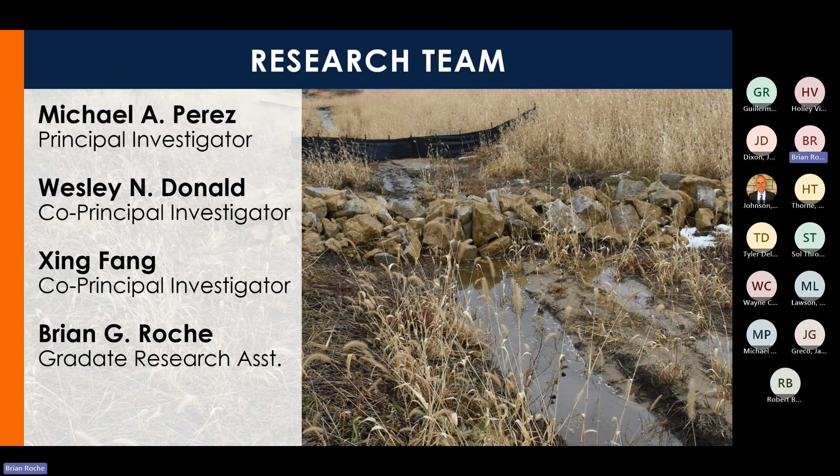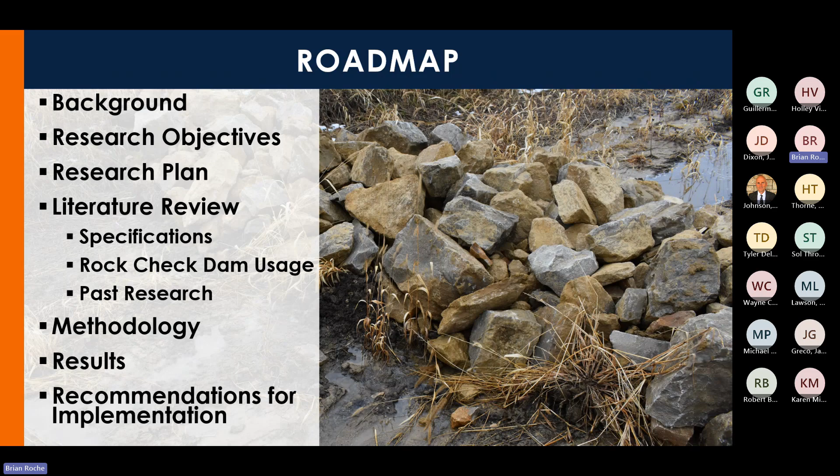Quickly, just wanted to touch base on the plan for the presentation. We'll start with some background, then go through some research objectives, our research plan, our literature review, and then our testing methodology, results, and recommendations from all this.

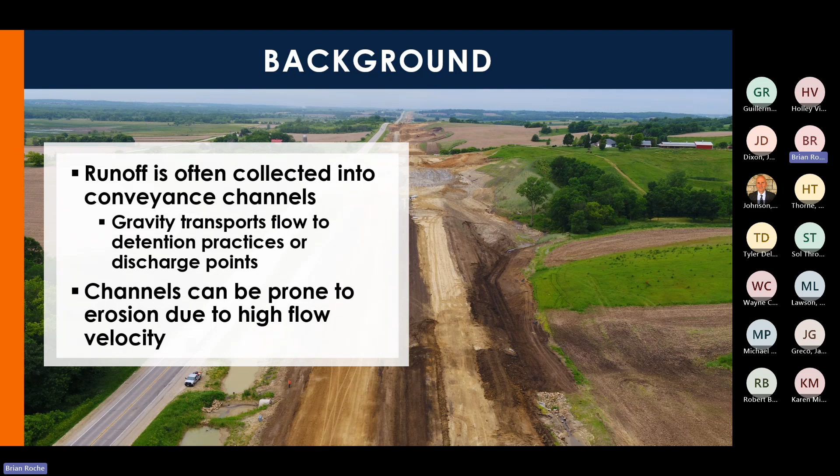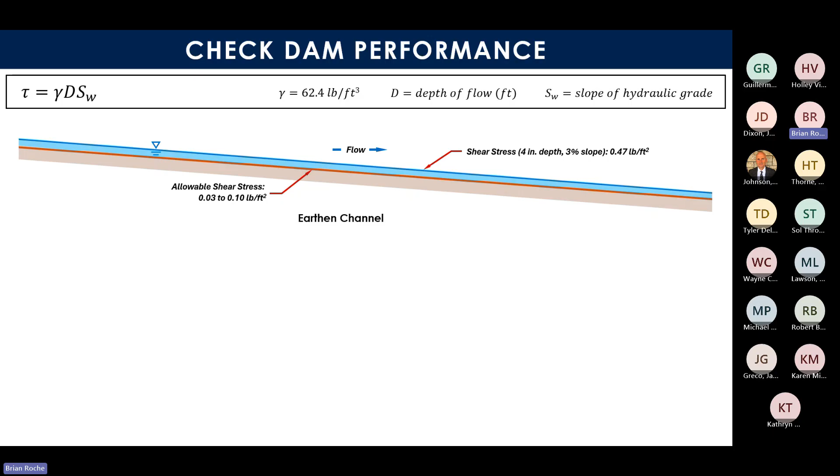Runoff on construction projects, especially highway construction, is often directed into conveyance channels. These channels can be at risk of erosion, especially before stabilization, due to high flow velocities, which can also prevent that stabilization from occurring. Shear stress is the leading driver of erosion in channels and is based on the flow depth, the unit weight of the fluid, and the slope of the hydraulic grade line. Earthen channels don't have much allowable shear stress before erosion occurs if they're not stabilized. Even this 4-inch depth flow would be erosive for this earthen channel.

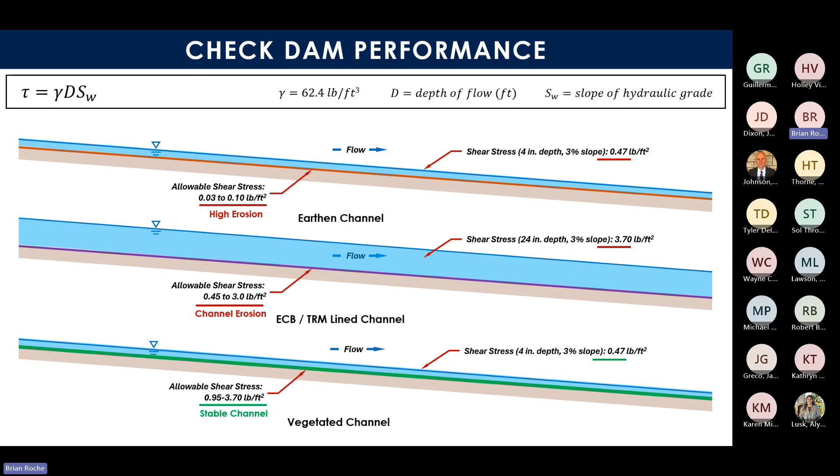Vegetation being established in channels can increase the shear stress capacity of a channel and prevent erosion from occurring. However, a lot of times on construction projects, vegetation has not yet been established. Other erosion control practices, such as erosion control blankets and turf reinforcement mats, may be used to increase the shear stress capacity of channels and prevent erosion. However, channels with more flow can increase the shear stress to erosive levels for both vegetated or lined channels.

So to improve the protection of these channels, ditch checks, such as the rock check dams we're going to talk about today, are installed to reduce the slope of the hydraulic grade line to effectively zero, therefore reducing the shear stress to zero and protecting the channel from erosion. However, as you can see here, these are only effective if they impound the full height of the installation and are able to form that pool of slow-moving water that reaches the previous installation.

Improperly installed, designed, or maintained ditch checks or check dams that do not impound flow to the top of the installation are going to have areas of channel that are still subject to those steeper hydraulic grade lines and erosive conditions. So you'll have some areas protected from flow. However, upstream of that hydraulic jump, or the location where flow transforms from high energy erosive conditions to slower moving non-erosive flow, the channel will have highly erosive conditions upstream that still have that high slope of the hydraulic grade line.

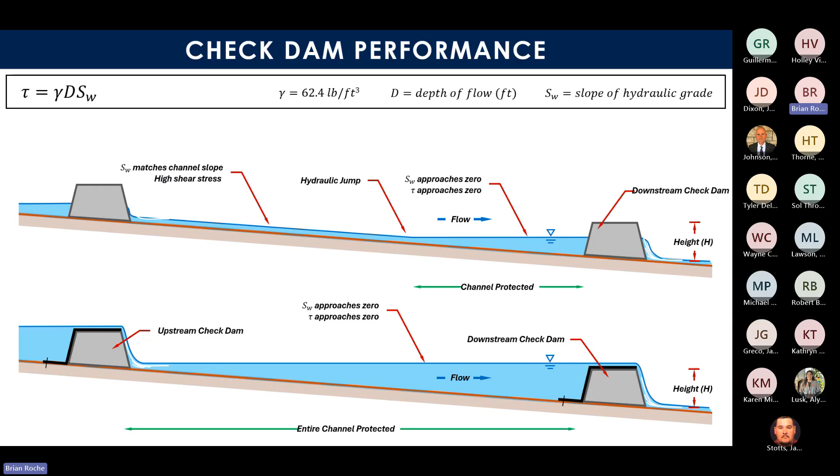Ditch checks are used to prevent erosive flows by forming a pool of water upstream, slowing velocity. These primarily function as an erosion control practice, but they do have some secondary benefits in sediment capture through deposition in that impoundment formed upstream.

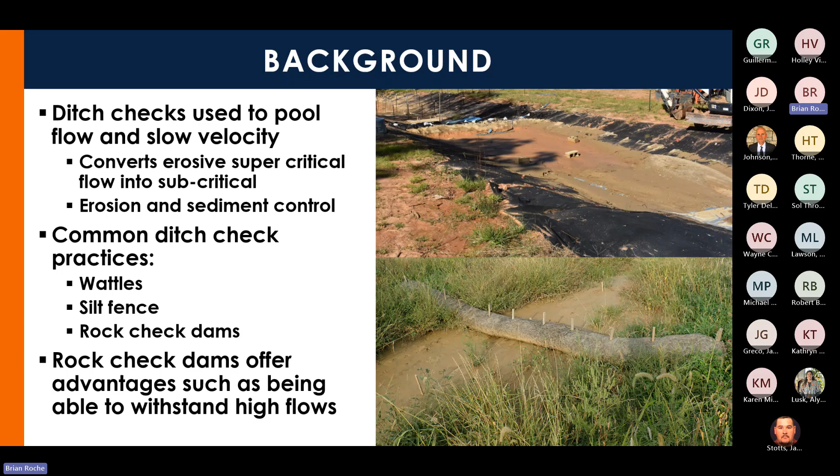Common ditch check practices are wattles, silt fence, and rock check dams, with rock check dams offering advantages over the others. They're commonly recommended or used in channels where high flows are expected, or where other installations have failed due to higher flow rates, because rock check dams, being formed of rock, are less likely to wash out due to high flows.

These ditch checks are typically installed in series in a channel, with multiple going down the channel, spaced apart based on the theoretical ponding length. The top of the downstream practice is at the same elevation as the bottom of the practice immediately upstream, so that if it impounds all the way to the top and overtops, you'll have that pool of water stretching from one installation to another, ensuring the entire channel is protected.

However, in practice, a lot of times this doesn't happen. With a high flow-through rate for a ditch check, you're going to have portions of the channel that'll be unprotected from those erosive flows.

This leads us into the objectives for this research, which is to evaluate the existing Iowa DOT rock check dam standard through large-scale testing, and then use the testing results to develop and evaluate efficient, cost-effective rock check dam installation enhancements.

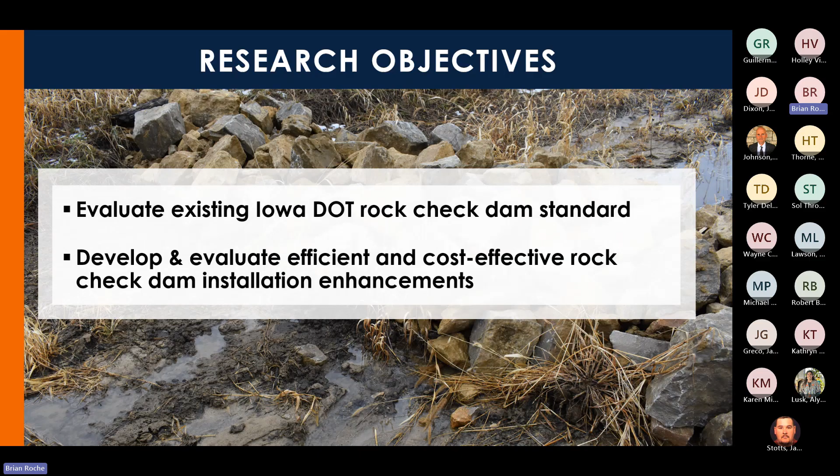To complete these objectives, we developed a 5-stage research plan, starting with a literature review with the goal of aiding in identifying modifications and developing testing methodology, leading into development of our testing methodology, and then conducting our full-scale experiments and analyzing data.

Tasks 3 and 4 were an iterative process where we analyzed the data from some tests and used that data to develop modifications to then evaluate further. Our final task was taking all of this data and recommendations and developing a final report that outlines the literature review, the methodology, the results, and the recommendations.

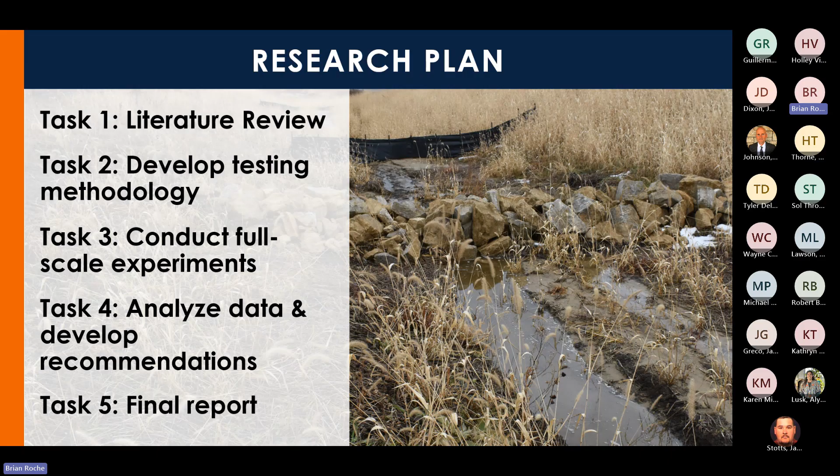Our first completed task was the literature review, which focused on investigating rock check dam standards for other states and jurisdictions, the Iowa DOT's usage of rock check dams, and past research on ditch checks as a whole and rock check dams.

First, we looked at rock check dam installations for DOTs across the U.S., as well as some international standards. We saw a good bit of variation in components, such as the size of rock, the height of the check dam, the use of overlays, underlays, the depth of the weir to allow for controlled overflow, and whether they're trenched in. We did see, however, that most are similar to the Iowa DOT standard.

About 2.5 feet tall, with a 6-inch weir, composed of large rock only, with a geotextile underlay and excavation beneath the installation. We did, however, see that some jurisdictions used components to increase impoundment, such as 2 using geotextile overlays and 11 using a small choker stone on the upstream face.

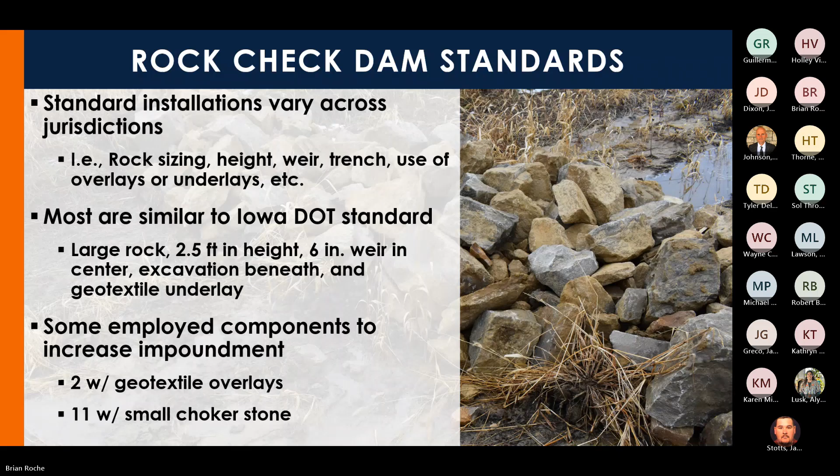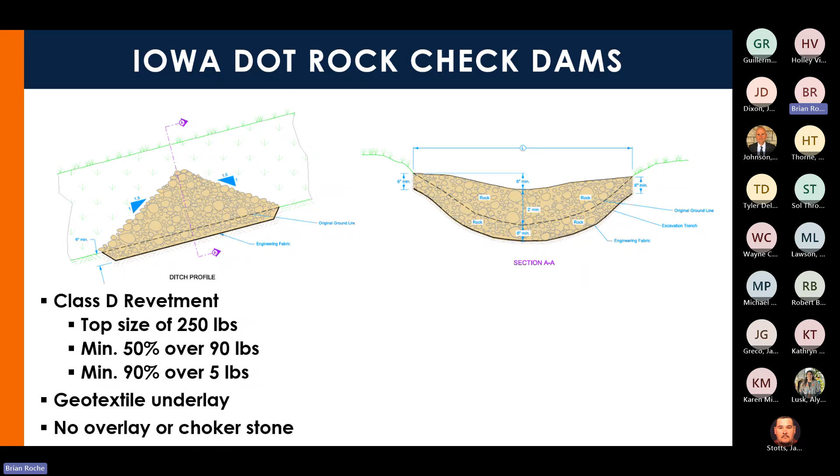The Iowa DOT standard used large rock alone with a top size of 250 pounds, at least 50% of that rock being over 90 pounds, and at least 90% being over 5 pounds. They had no overlay or choker stone, so no additional components aid in the formation of impoundment besides the rock. There's also a geotextile underlay going under the entire installation to prevent undermining, as well as a 6-inch excavation in the channel that the check dam was installed in.

We also wanted to look at how much Iowa actually used these practices, so we looked at 5 years of bid tabs on Iowa DOT highway construction. We found that in total they spent over $4 million on these rock check dam installations, in both installing, maintaining, and removing these practices, with an average cost of over $500 per check dam. This really indicated there's a research need to make sure these funds are being used effectively.

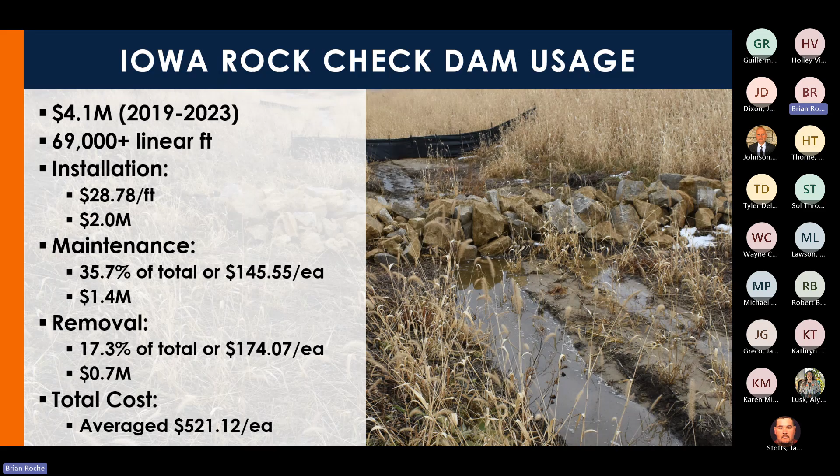So diving into some past performance testing. Most have been completed on other practices, typically wattles. This research is divided into 3 main categories: field monitoring, small scale testing, and large scale testing. We didn't really see much testing on rock check dams, but we did find some large scale research that we'll get into.

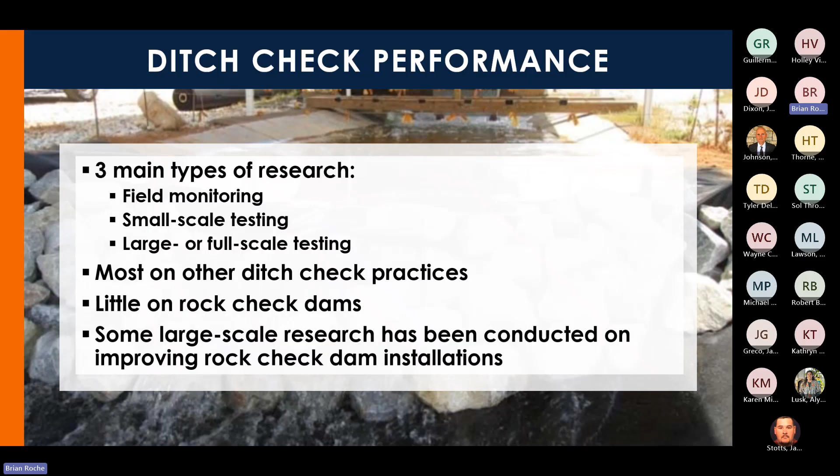So small scale testing is primarily in flumes, and this has really been focused on wattles. A big takeaway from these flume evaluations is that most practices do not impound to that theoretical level, as you can see in this graphic here that spacing guidance is based on, even if they're able to impound to the top of the practice.

Additionally, a performance measure called impoundment length and depth efficiency was developed that indicates the percent of the channel that's protected from erosive flows. The actual impoundment length in these tests was determined based on the length of that subcritical flow, from the upstream face of the practice to the hydraulic jump, compared to that theoretical standing pool to develop an efficiency.

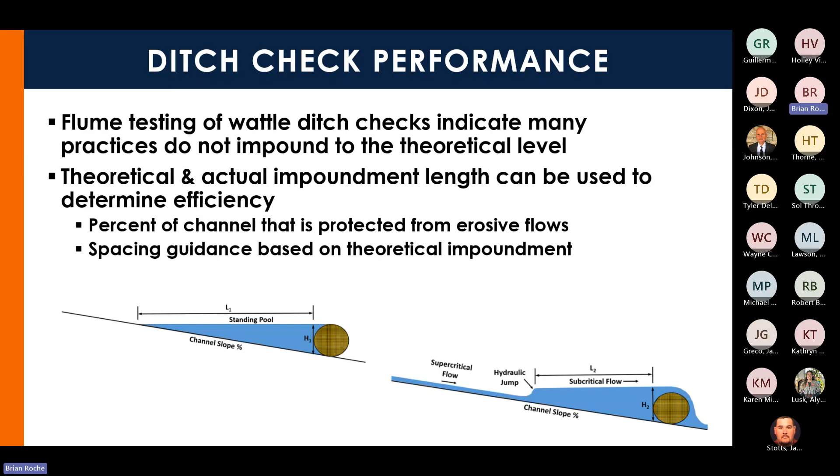One field study we focused on was completed in Iowa a few years ago. It evaluated standard and modified ditch check installations, including silt fence, wattles, and rock check dams. Wattles and silt fence were able to be improved to prevent occurrences of failure.

The Iowa DOT standard rock check dam was found to be kind of ineffective at preventing erosion due to undermining and high flow through rates. But unfortunately, these installations were not able to be modified due to changing site conditions, which is a common limitation of field monitoring studies, along with different storm and site conditions that can make comparisons difficult between different sites.

So large-scale testing, such as those completed by Donald et al. at our research facility back in 2014, attempts to reduce the limitations of small-scale testing and field monitoring by evaluating full installations under controlled conditions.

This particular study found that the large rocks of the Alabama DOT rock check dam standard failed to protect more than half the channel, with an impoundment efficiency of only about 48%, and that this performance was increased using either a coarse aggregate choker on that upstream face or a geotextile overlay.

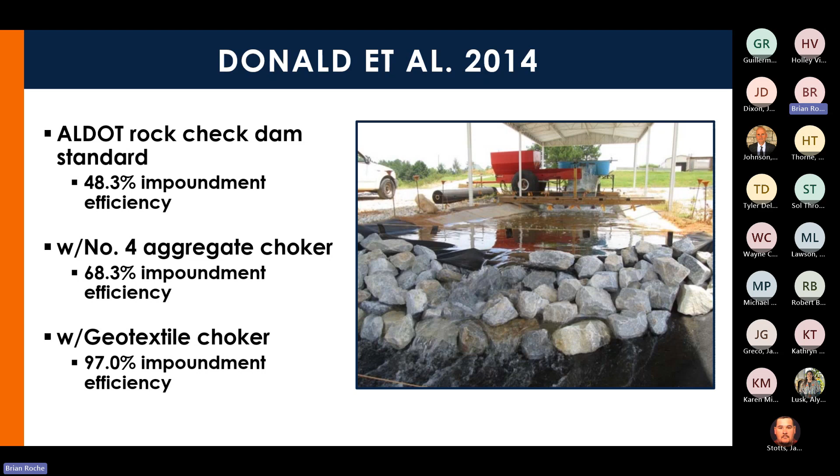So our literature review as a whole found that there was a clear disconnect between rock check dams commonly used and prior performance testing results. We're seeing that DOTs around the country are spending a lot of money on these installations that can definitely be improved.

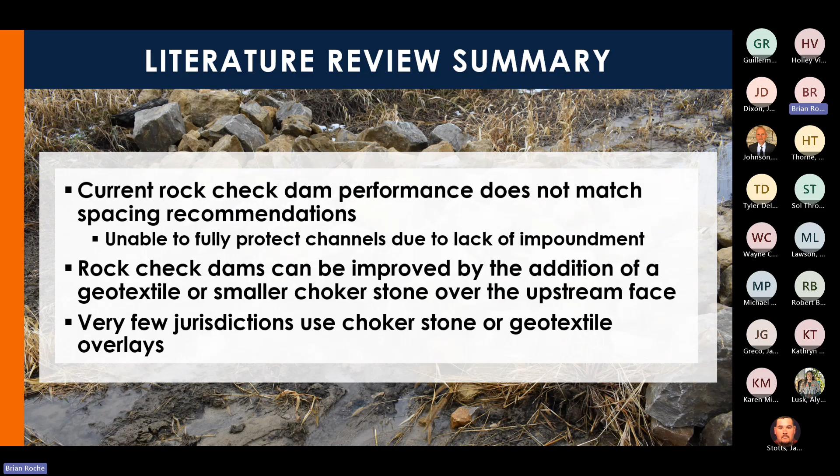So from there, it leads into our second task, which was the development of our testing methodology. All of our testing occurred at the Auburn University Stormwater Research Facility, a 10-acre outdoor lab space dedicated to producing innovative and practical solutions for stormwater management through interdisciplinary research, product evaluation, and hands-on training, with testing occurring in this channel right here.

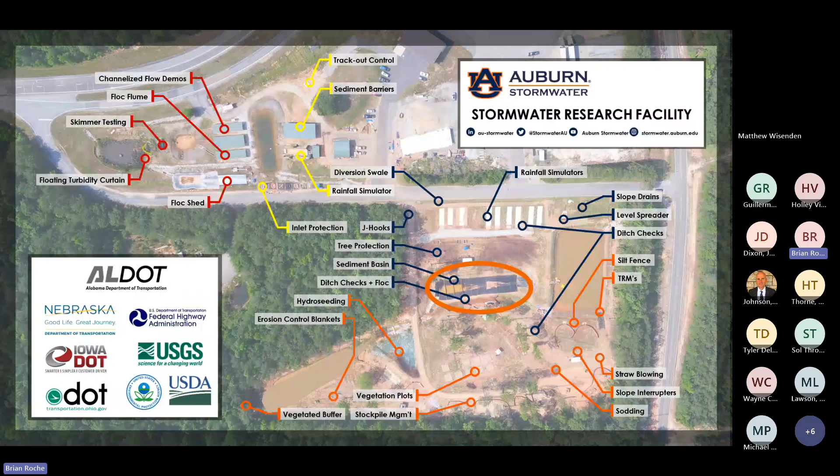This testing was completed in a channel with a downstream sediment basin representative of those found on Iowa highway construction projects. The entire channel was lined with geotextile to prevent extensive maintenance between tests and to allow for repeatable results, making sure there aren't variables affecting results. But in practice, these channels would likely be earthen and unlined.

So we introduced flow from a nearby supply pond into a weir tank with a series of valves that allow for the adjustment and monitoring of introduction flow rates. After the flow leaves that weir tank, it flows into a flow transition area that aims to reduce that initial energy to conditions representative of Iowa highway construction projects.

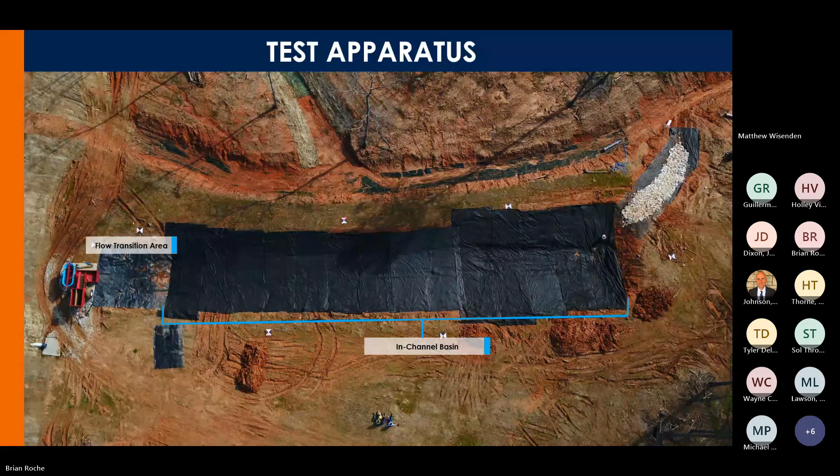So the geometry of the standard Iowa DOT roadside channel has a 10-foot bottom width, a 5-foot depth, 3-to-1 side slopes on one side, and 3.5-to-1 on the other.

So in our test channel, which you can see here, we installed string lines to serve as measurement cross sections, approximately 5 feet apart. We installed 16 upstream and 2 downstream. For the upstream, we wanted to make sure we're going past that maximum theoretical impoundment length, which we found to be 63 feet, so between cross section 3 and 4 here.

We found, based on a survey, the elevation of the channel that would be equal to the height of the check dam downstream. We also installed those 2 downstream cross sections to make sure we're evaluating conditions immediately after the installation.

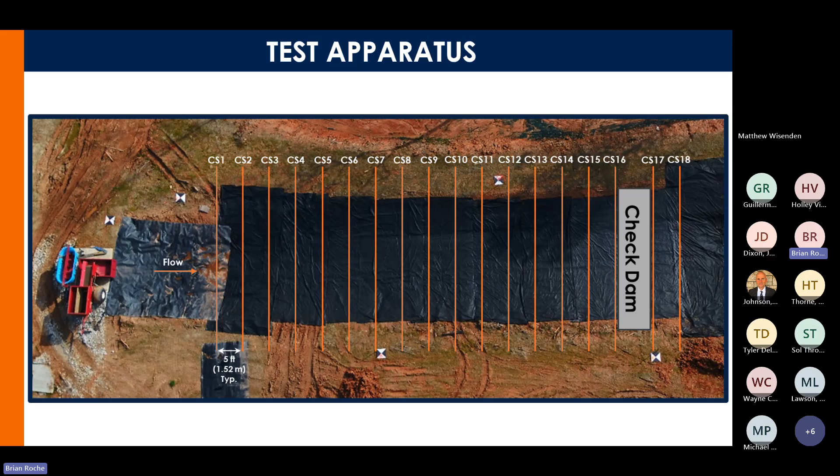At first, we're primarily looking at hydraulic performance of these installations due to their use as erosion control practices and slowing flow. So each cross section, we measured flow depth and velocity at 3 locations to generate a full flow profile. We also measured the distance from the front face of the installation to that hydraulic jump to compare to that theoretical impoundment length of 63 feet to develop an impoundment efficiency.

We also wanted to evaluate dewatering time to make sure that practices can recover from storm events and be able to withstand another one coming in after, as well as, if there's extended dewatering times, you'll have difficulty establishing vegetation.

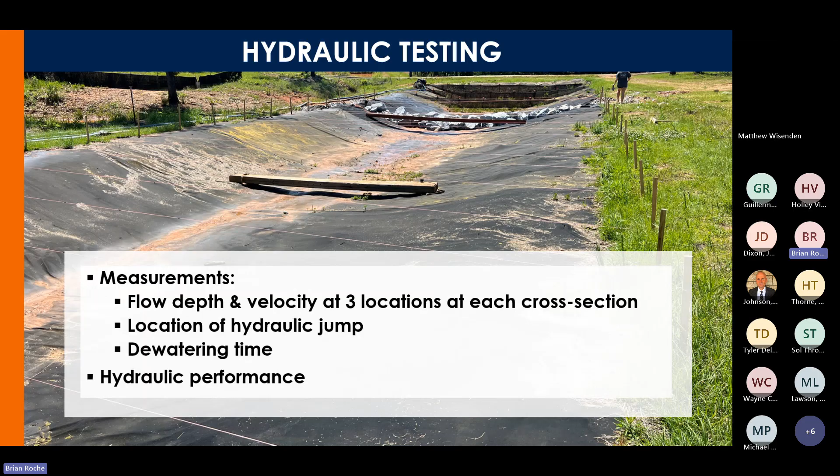So first, we evaluate our standard installation, followed by 4 modifications. Each installation was evaluated 3 times for hydraulic performance under both a low and high flow rate. That low flow rate is representative of the peak flow of 1/2 acre in Iowa, and that high flow rate is 1 acre, to indicate performance under various conditions.

Developing these modifications was an iterative process with the overall goals of increasing performance and reducing costs. So after we evaluated the standard and 4 modifications for hydraulic performance, we selected the highest performing one, with also consideration for cost and installation efforts, to be our most feasible and effective installation, or our MFEI.

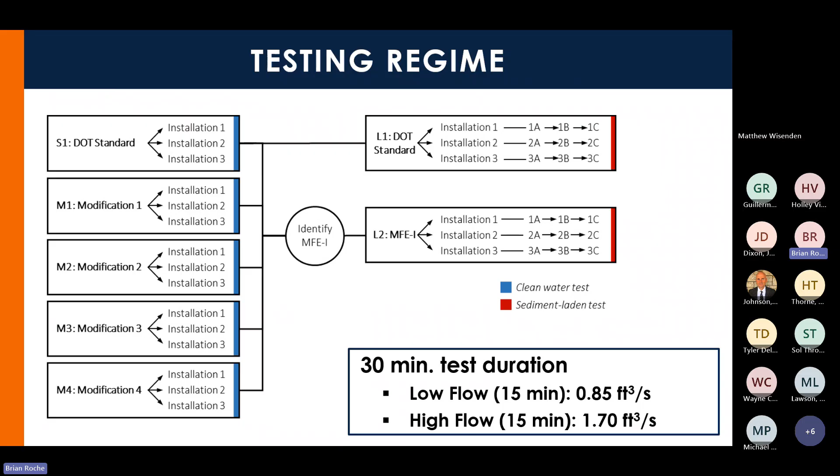After completing the hydraulic testing, we evaluated both the standard and the MFEI under sediment-laden conditions to determine improvements in secondary sediment control benefits.

The sediment-laden testing used a sediment introduction rate of about 65.4 pounds per minute, seeded by hand, and a flow rate of 1.7 cubic feet per second. This rate's identical to testing of past Iowa DOT sediment basin practices using that same testing apparatus that we're using, to allow for comparisons. Additionally, during testing, we took water quality samples every 3 minutes during the flow introduction period.

And also regularly through that dewatering period afterwards. We took these samples at 3 locations: one upstream of the theoretical impoundment length to serve as a kind of introduction of turbidity and total suspended solids, as well as immediately upstream of the check dam and downstream, to determine overall treatment.

So our third test is actually getting into the completion of our large-scale testing. First, we're going to start with the hydraulic testing results, and this was just flow straight from the supply pond with no additional sediment added.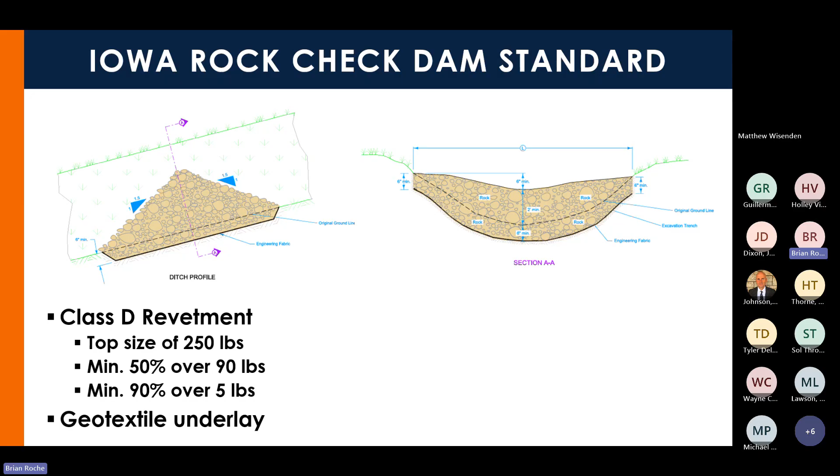So our first test was on the Iowa DOT rock check dam standard, which you can see here. We had large rock, a geotextile underlay, and an excavation beneath. And here's what it looks like in action. You can kind of see very little impoundment formed upstream.

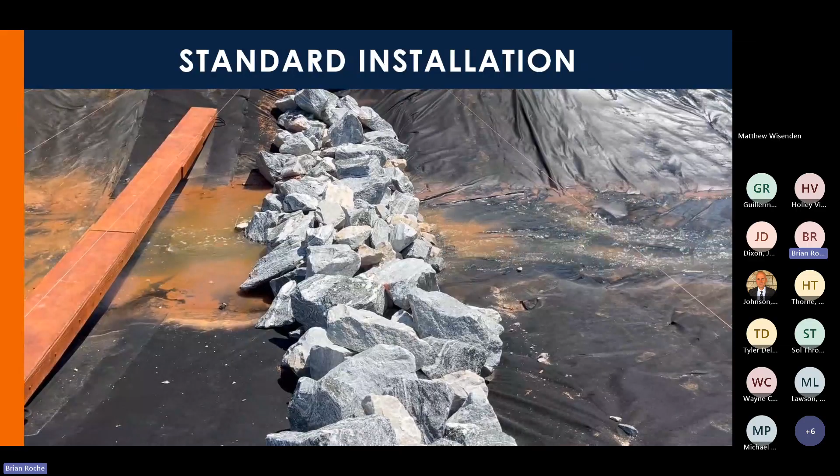One thing we also wanted to consider through all this was keeping cost in consideration, to make sure our results are practical and implementable. So for each installation, we did an approximate material cost estimate, with the standard being about $673 of material.

So the standard installation only impounded an average of 6 feet upstream under those high flow conditions, which really indicates that over 90% of the channel was still subject to those highly erosive flows. And we really saw, looking at flow velocity, it only reduced flow velocity at that first cross section immediately upstream, and also immediately jumped back to highly erosive flows downstream.

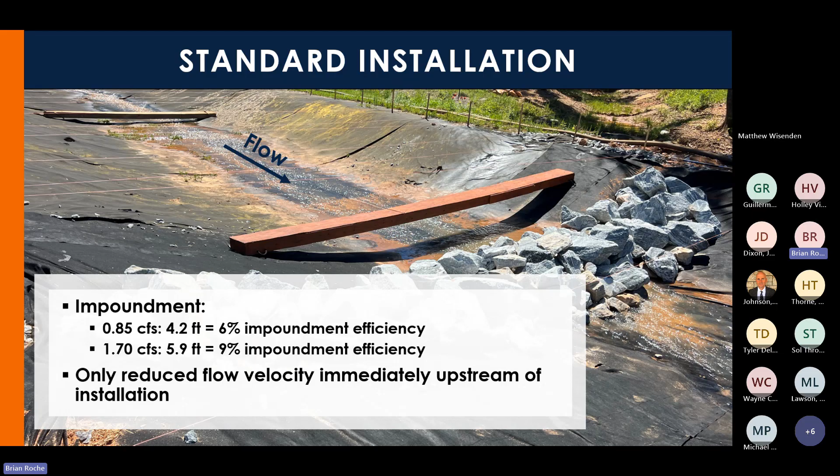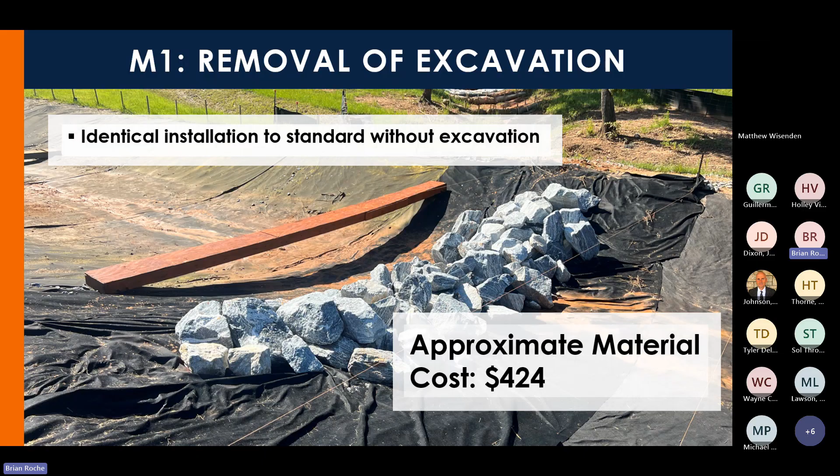So our first modification intended to see if the excavation beneath the installation actually aided in the formation of impoundment. The removal of this excavation would save both material costs, with a reduction of approximately $250 of material, while also reducing installation efforts and costs.

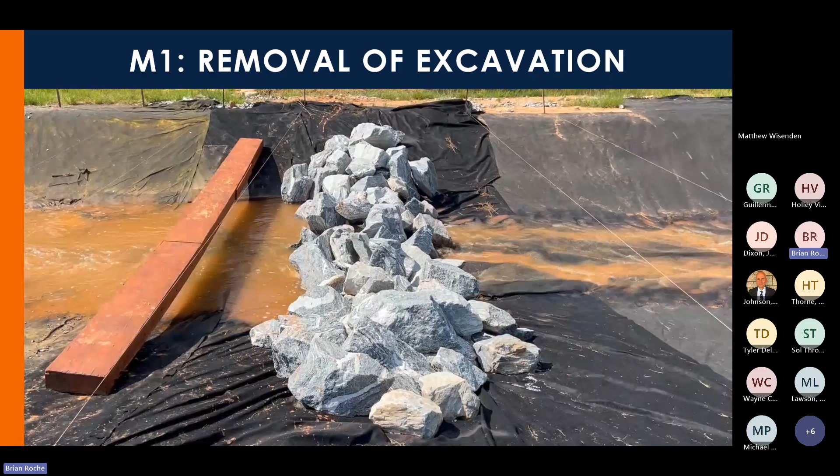So as you can see here, it performed very similar to the standard installation, with very little impoundment formed upstream. And you can actually see that hydraulic jump on the left of the screen is only a few feet from that front face of the check dam.

So we ran some statistics. We found that there was not a statistically significant difference in impoundment formed compared to the standard, kind of indicating that cost can be reduced by just installing that installation on grade. Due to this conclusion, most of our other modifications were installed on grade, due to us not seeing any degradation of performance with the removal of that excavation.

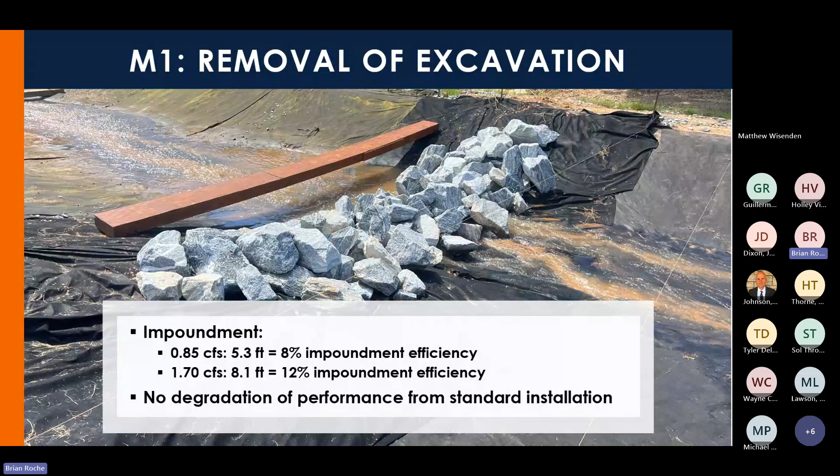So through these two installations that used the larger rock, we really saw that flow was able to pass through large pores between these rocks, leading to a lack of impoundment formed. That led us to our second modification, where we're trying to improve performance using a smaller rock gradation that results in smaller pore openings.

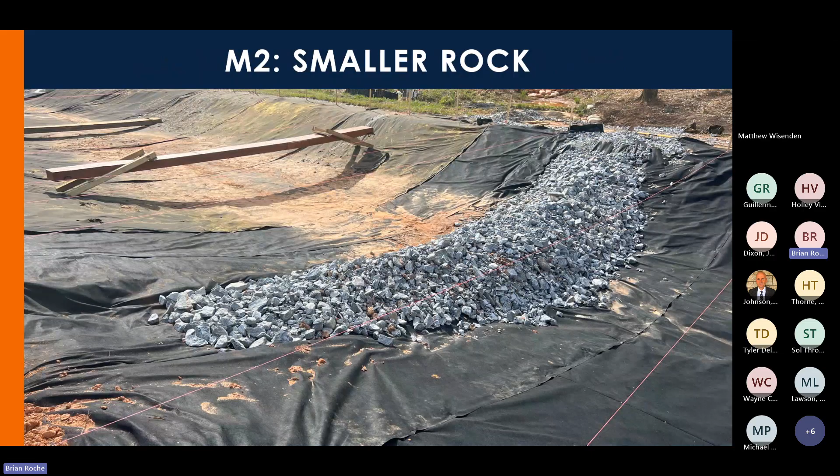For this, we used a gradation of rock that's often used on Iowa DOT construction projects, which they call their erosion stone. It's a nominal 6-inch diameter, between 3 and 9 inches. We wanted to make sure to use a gradation of rock that's actually available in Iowa to make sure it's implementable. This installation did use that excavation from the standard, as we were only trying to determine if that rock gradation improved performance. Additionally, this reduced approximate material cost due to this material being less expensive than the larger rock.

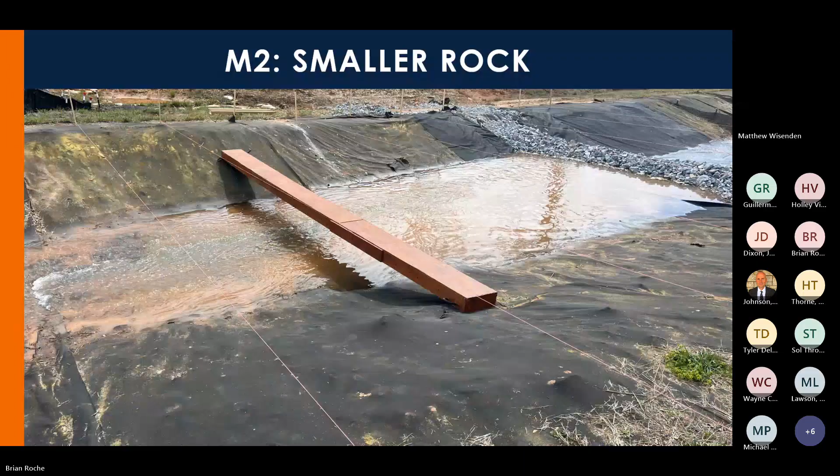Here's a better angle if you can see that length of impoundment. We found that under that high flow rate, we're able to get to approximately half of the channel.

Additionally, one thing we were a little bit worried about switching to smaller rock was washout. We did not observe this even under higher flow conditions above 1.7 cubic feet per second.

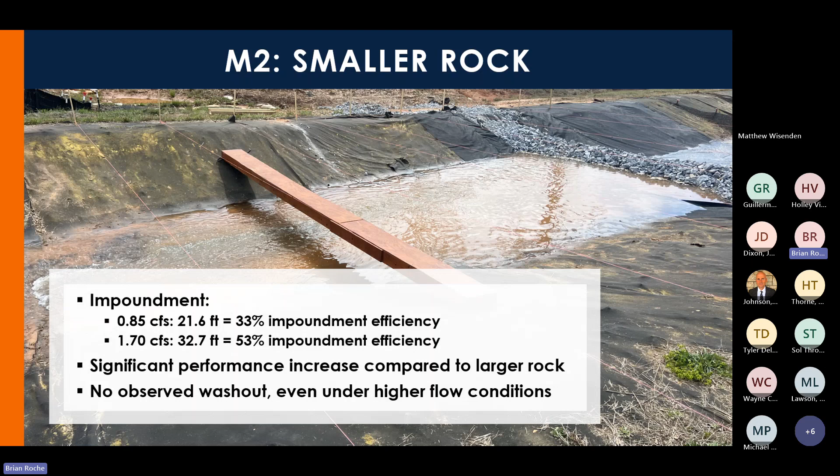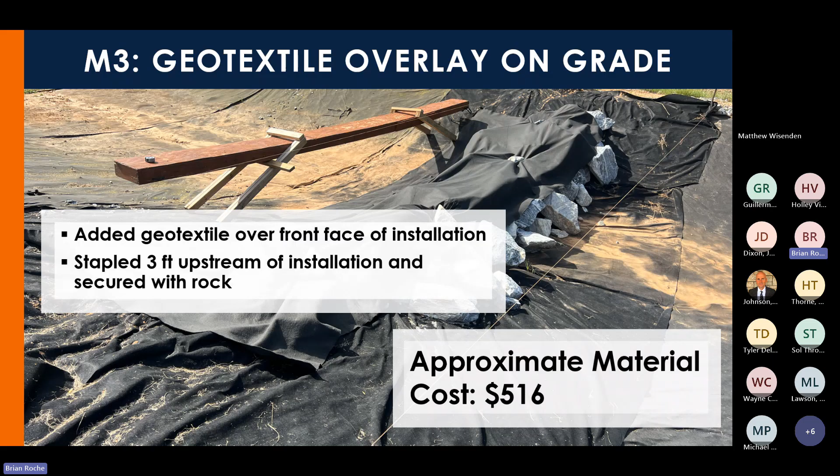So based on the previous research, we added a geotextile overlay to that standard rock gradation. This was secured 3 feet upstream with sod staples every 6 inches, and then on the downstream of the installation just with loose rock. We saw a slight increase in material cost compared to that large rock with no excavation, due to the cost of geotextile, but this was still beneath that standard cost due to not having the excavation that requires more material.

So this did considerably increase impoundment formation, to about 78 and 77% for those low and high flow rates.

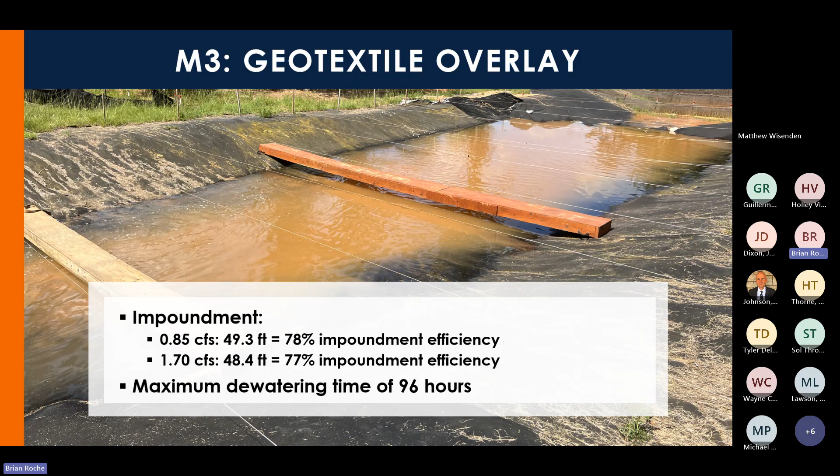However, we did see a couple of deficiencies. One of these being extensive dewatering time. Like I've mentioned before, if this pool of water is able to remain in the channel for extended periods of time, you're going to be less likely to have vegetation established in the channel, which is the final goal of these projects. Additionally, as you can see here, we saw flow was overtopping at the low points between these large rocks and not impounding at full design height of the installation, leading to less impoundment formed, with only 78% of the channel being protected.

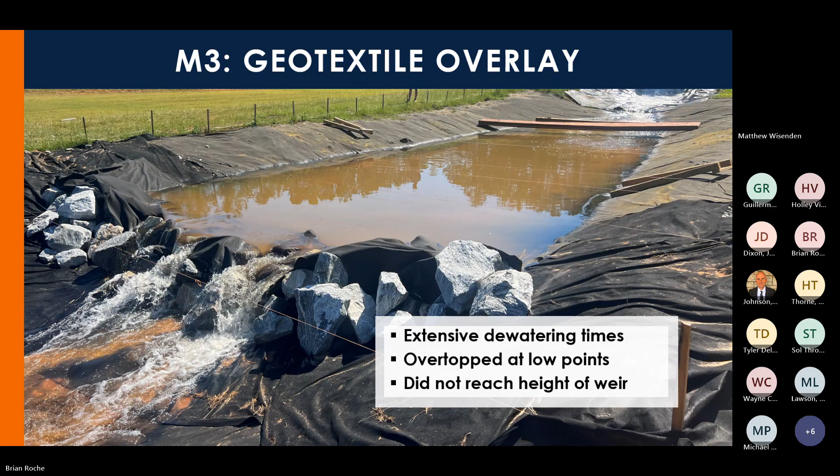So the first of these deficiencies we wanted to tackle was that extended dewatering time. To improve upon this, we added 9 1-inch holes, cut in a cross configuration with a standard box cutter. These were in 3 columns, spaced every 1 foot vertically, with one of these columns being at the center of the channel, and then the other 2 columns being at the edge of the bottom width.

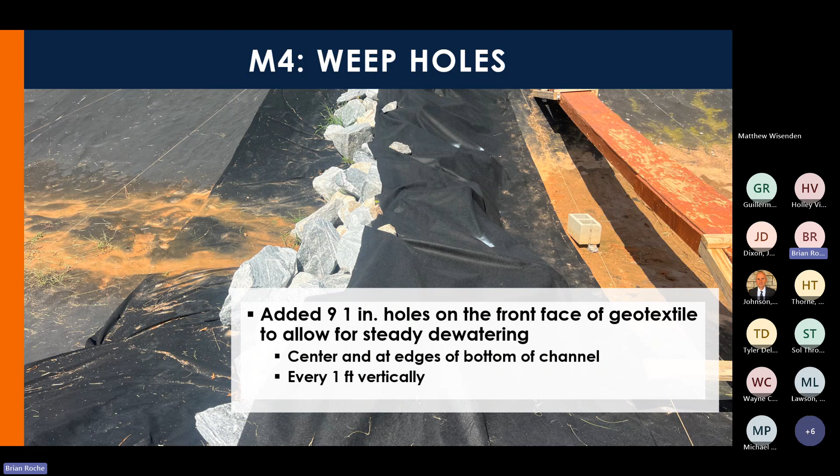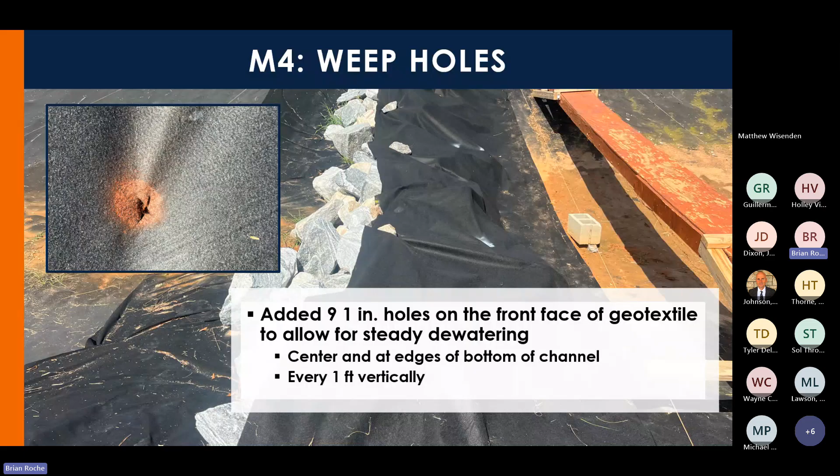Here's what those holes looked like a little closer up. It's effectively a 1-inch hole, cut in that geotextile to make sure that we're able to dewater more effectively. This also had an identical material cost to that other installation with the geotextile overlay, but a slightly higher installation cost since you need to get in the channel and cut those holes.

We found very similar performance with these dewatering holes compared to the geotextile overlay, with no statistically significant difference in hydraulic performance. This reduced dewatering time to about 7.5 hours on average, from that maximum of 96 hours we saw without the dewatering holes.

Our next modification, we wanted to see if we could improve that design height and have a more consistent height of that weir in the center. So to do this, we employed that smaller rock gradation with the geotextile overlay.

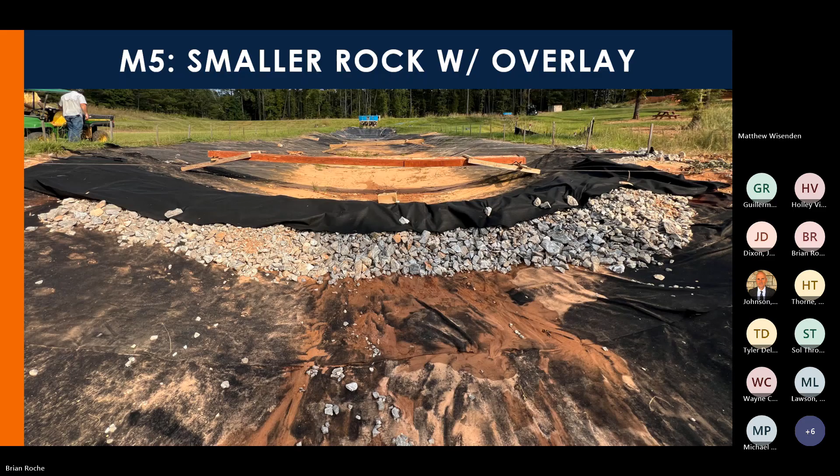With that first installation with just that smaller rock, we found that it was easier to form the check dam and reach the proper size specifications more consistently. Additionally, due to this being the cheaper material, it slightly reduced material cost to approximately $433.

We found that this did increase impoundment due to having that more consistent height of the weir. As you can see in this image, flow is going over that entire width rather than finding those low points between the rocks.

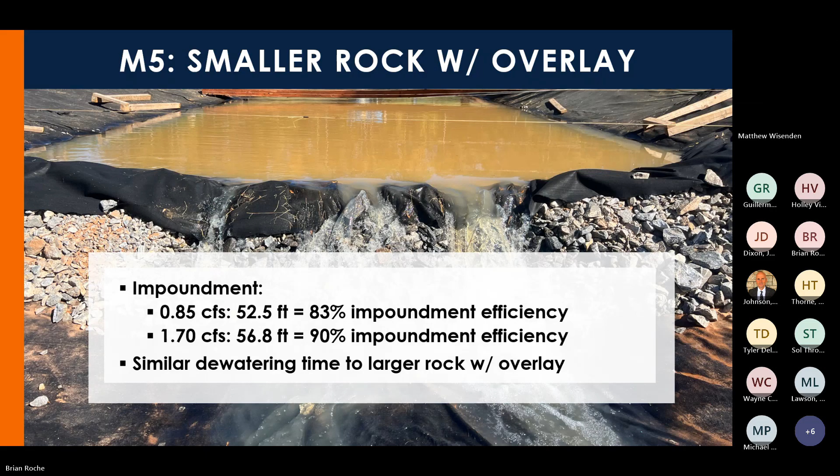We did, however, see that extended dewatering time associated with just the geotextile overlay becoming clogged with sediment over time. I mentioned this allowed for that more consistent height, but we still saw those extended dewatering times.

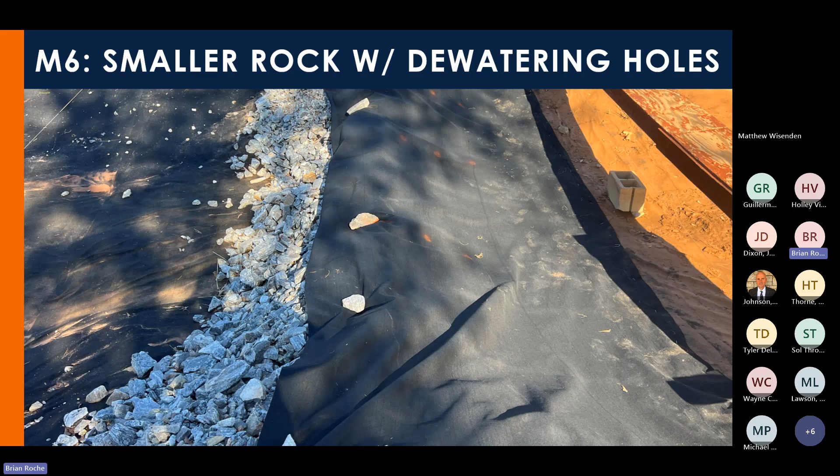So our next modification we evaluated was using that smaller rock gradation, the geotextile overlay, but adding the dewatering holes. This had the same material cost as that previous installation. We found very similar results for that smaller rock with the geotextile overlay, however, with a reduced dewatering time.

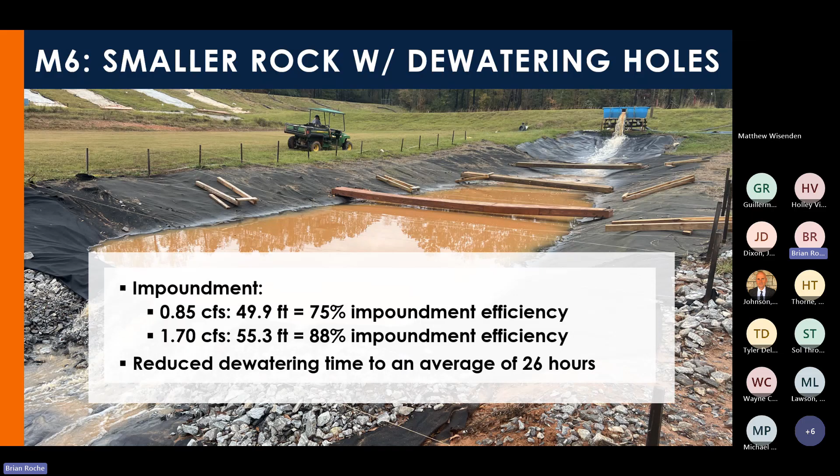For these tests and the previous modification, we installed a pressure gauge immediately upstream of the installation to measure water depth and better evaluate how these installations dewatered. You can see a comparison between the installation with the geotextile overlay in blue and the dewatering holes in orange. This increased with each subsequent test, even with those dewatering holes, showing that maintenance of these dewatering holes is required to ensure consistent dewatering times.

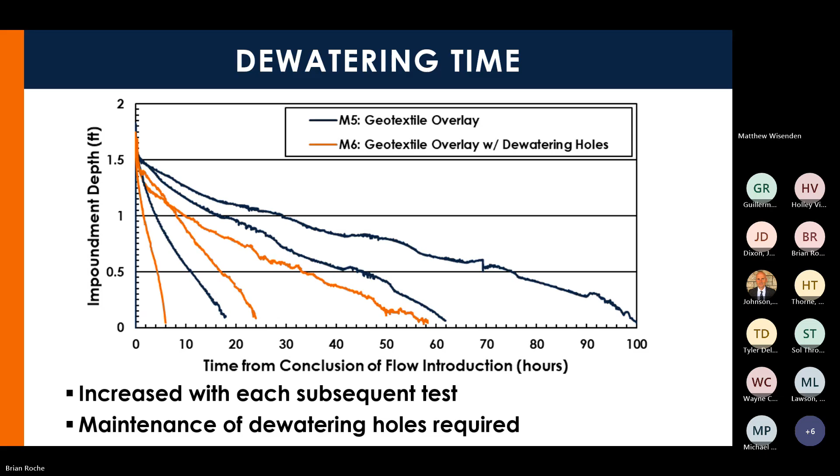Our final modification aimed to further reduce the material cost of installations by reducing the bottom width perpendicular to flow from 6 feet to 4 feet by making the side slopes of the installation steeper. This reduced material cost further by approximately $129, to about $300. Testing results of this installation showed similar performance to other installations with those geotextile overlays, dewatering holes, and that smaller rock gradation.

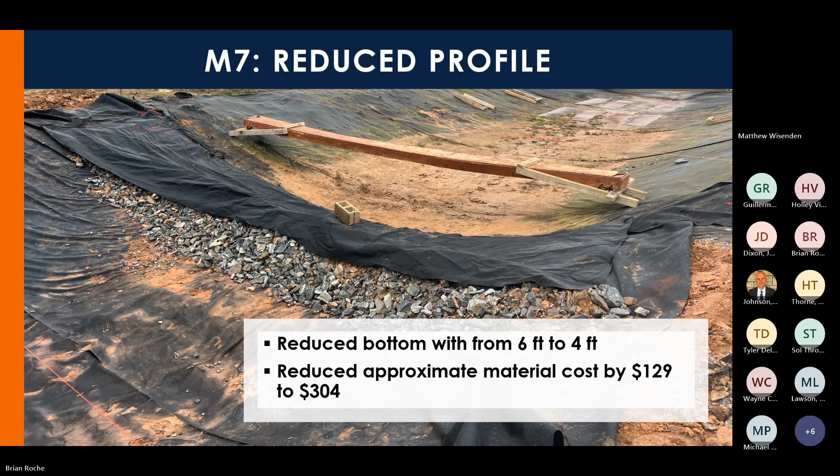Here's an overview of our hydraulic testing results with our cost estimate. As you can see, our modification 7, which has that reduced profile, no excavation beneath, a smaller rock gradation, and a geotextile overlay with dewatering holes, performed the best out of all our installations and was also the least material cost. Due to this, it was selected as our most feasible and effective installation.

We also saw similar results with that high flow rate. One big thing we saw here was that the geotextile overlay - all those installations with that overlay - performed similarly, having the highest impoundment length, so the most area protected of the channel, as well as the most cross sections with that less erosive subcritical flow.

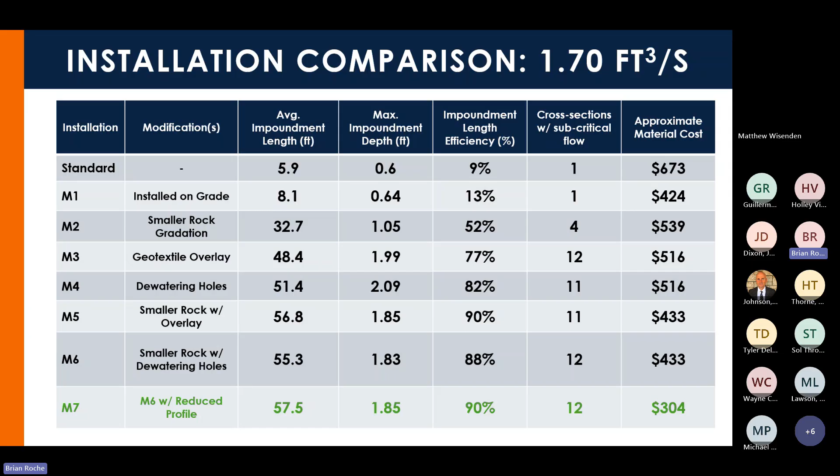You can see here the large rock alone with the standard, and the installation installed on grade, showed a lack of impoundment formation due to those large pores in the rock. The small rocks significantly increase impoundment compared to those first two, but only still to about half that theoretical maximum where that next upstream installation would be located.

Additionally, we saw that all the installations with the geotextile overlay performed very similarly in impoundment formation. However, none of these were able to reach that theoretical maximum of 63 feet, which shows that spacing guidance may need to be adjusted, or you might need to extend a geotextile underlay further down to protect erosion in that area of the channel.

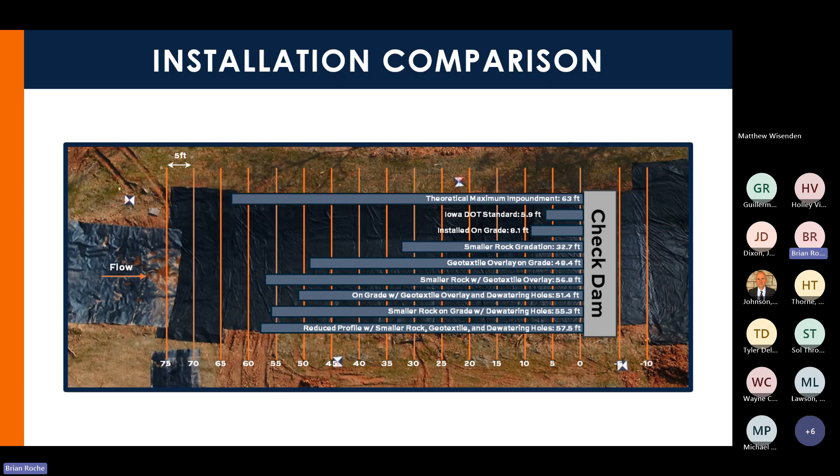We also wanted to run some statistics to prove our findings. So we ran a multiple linear regression model at a 90% confidence interval to determine how each installation component impacted impoundment formation. We used a base condition of no rock check dam installed with no impoundment formed, then a value of 0 for the components used in the standard and 1 for the modifications. For example, the standard installation would have a 0 in all of these components - the gradation, excavation, geotextile overlay - while the small rock gradation would have a 1 in that category.

So we saw high p-values for the excavation, the dewatering holes, and the reduced profile, indicating that these did not statistically impact impoundment formation, while also providing other benefits. Due to the lower p-values of the rock gradation and geotextile overlay, we found that those were the only components that impacted that hydraulic impoundment formation.

We also wanted to investigate flow velocity. A few takeaways from here: we saw an immediate increase in velocity downstream of every single practice to these erosive conditions. We also saw that, like the other results, those installations with similar components, such as that overlay, performed similarly, reducing flow to non-erosive velocities for much of the channel upstream.

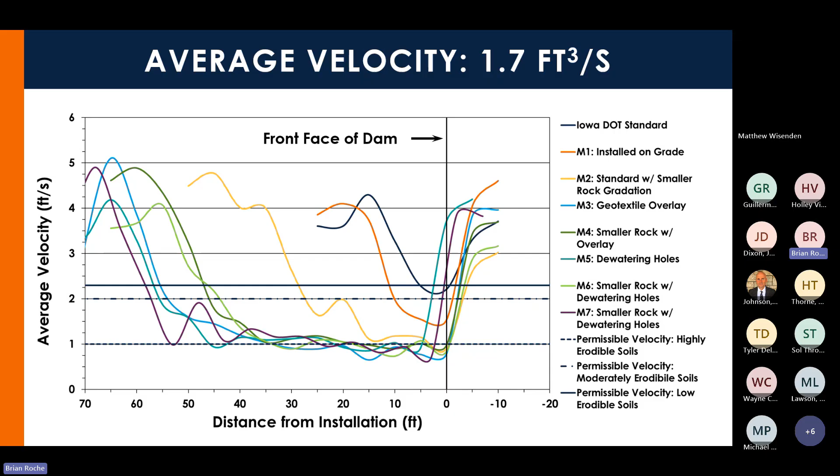We were able to come up with a few conclusions based on the data analysis of the clean water hydraulic tests. We found that excavation beneath the installation provided little benefit while increasing cost. Smaller Iowa DOT erosion stone outperforms the standard Class D revetment used for standard check dams, due to both the smaller pores without the geotextile overlay, as well as the more consistent weir heights with that geotextile overlay. We also found, matching past research, that addition of a geotextile overlay is vital to ensure installations impound flow and protect those channels from erosion.

Dewatering holes in the geotextile overlay reduce extended dewatering times without adversely impacting performance. We also found that reducing the width of the installation can reduce material cost without impacting performance or causing washout. Additional erosion control practice may be necessary if the soil of the channel is particularly erosive, especially downstream.

We even saw that even the highest performing rock check dams did not protect the entire channel from erosive flows, indicating that spacing guidance may need to be adjusted, or recommending an extended underlay a few feet downstream of the installation.

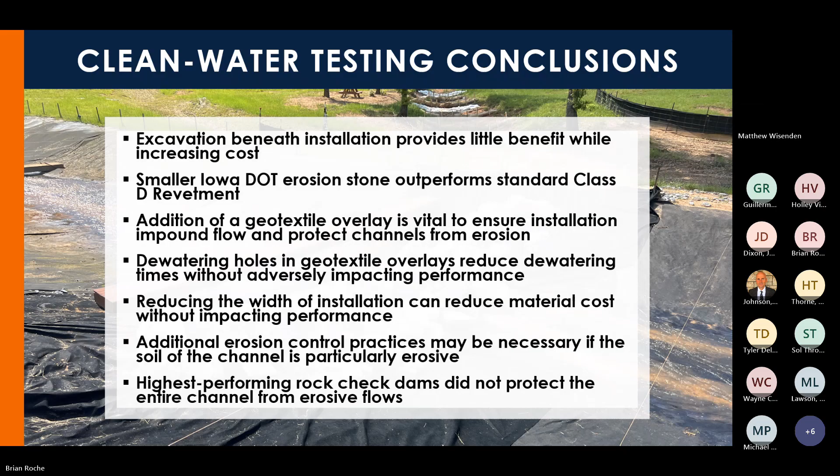After completion of these hydraulic clean water tests, we moved on to sediment-laden testing of the standard and the selected most feasible and effective installation. Just like in those hydraulic tests, we saw high flow-through rates and low impoundment lengths for the standard installation due to the large pores between the rock.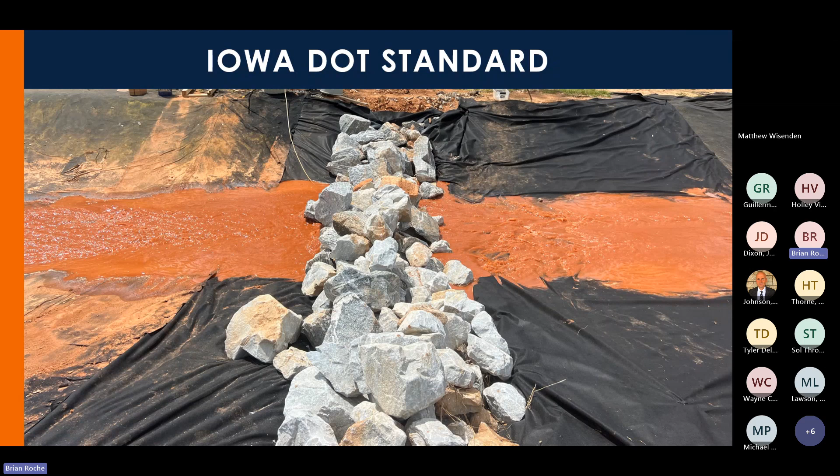This lack of impoundment formed upstream led to a lack of sedimentation being able to occur. We saw under 10% of the introduced sediment was captured upstream of the installation. To measure this, we compared our known amount of introduced sediment, removed all the sediment captured upstream after 3 tests, dried it, weighed it, and compared the two.

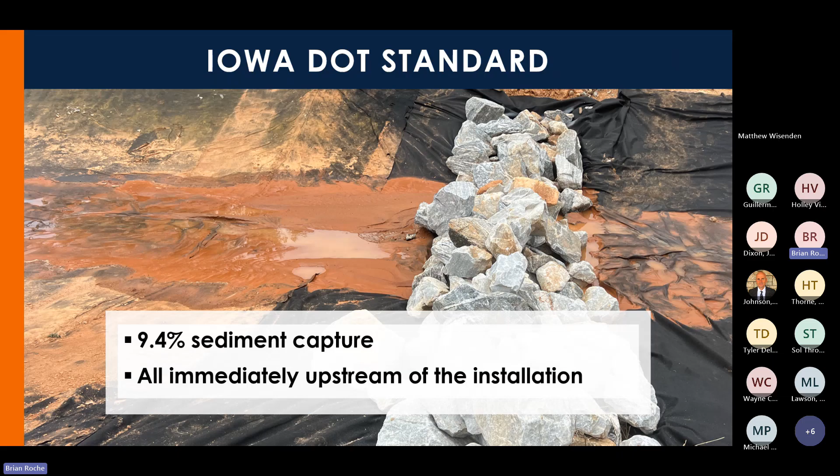In our water quality results, we primarily focused on turbidity. We did not see any water quality improvements. We found there was no statistical difference in turbidity between samples taken upstream of the installation and downstream, showing that no water quality treatment was occurring.

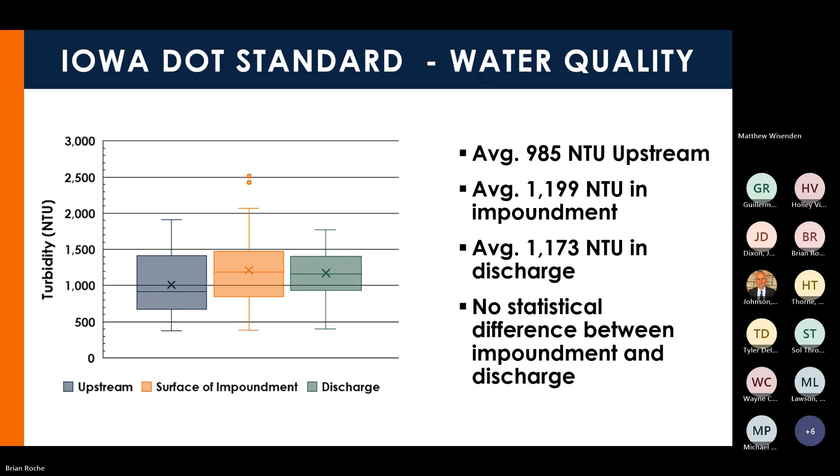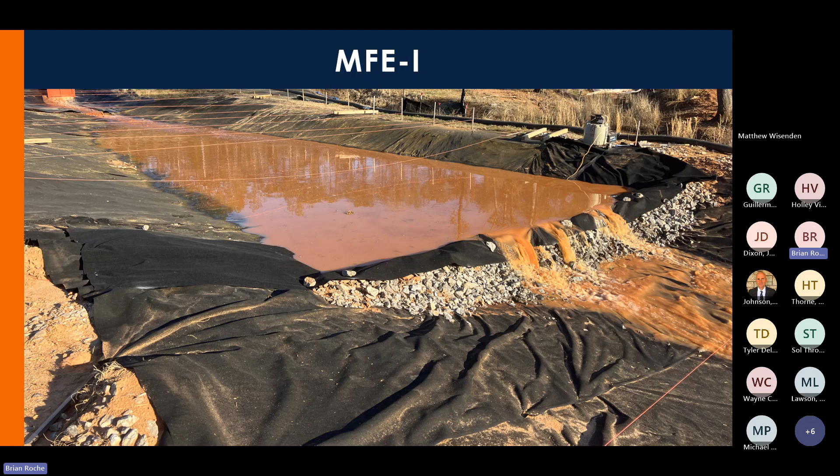So that most feasible and effective installation - the geotextile overlay of smaller rock with dewatering holes and a reduced profile - was also evaluated under these sediment-laden conditions, which you can see here with that additional impoundment length formed. We saw an increase in sediment capture to about 72%.

One interesting thing we saw was that a lot of that coarse material was deposited immediately upstream, or immediately downstream of that hydraulic jump, as soon as the flow was able to slow down.

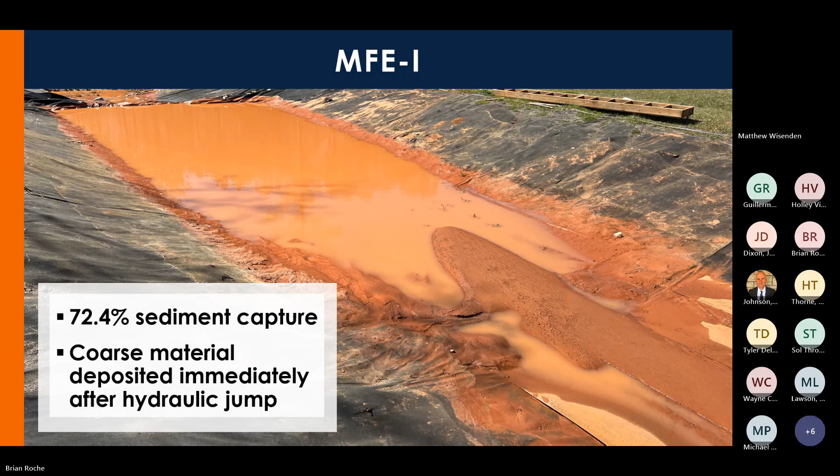So here are the water quality results. A couple interesting things we see here. In other practices, such as silt fence or sediment basins, the water at the surface of the impoundment formed immediately upstream tends to have lower turbidity than the bottom of the impoundment, which we did not see here. This lack of difference between the two was likely due to short circuiting that we saw due to overtopping.

Additionally, unlike the standard installation, we saw a clear pattern over time looking at that water quality. We saw what's called a first flush effect, where the first flow introduced after each test redisturbs the sediment that was there, increasing the turbidity immediately before it stabilizes out, evening out at about 500 NTUs as dewatering occurs.

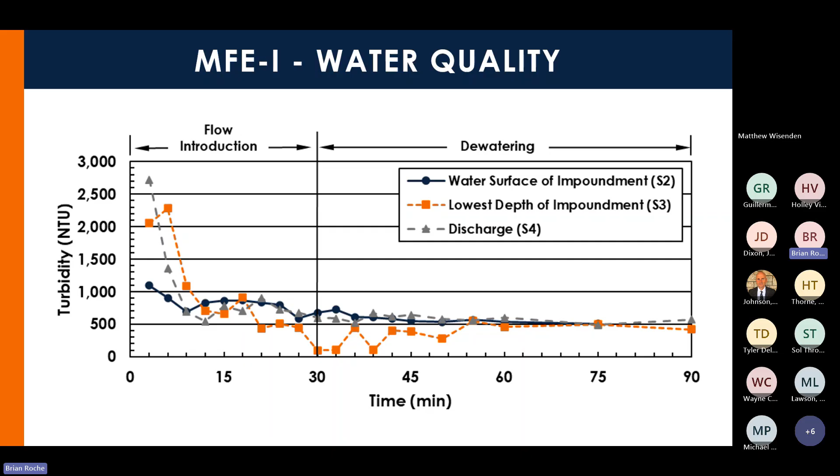On the standard and most feasible and effective installation turbidity samples, we ran two sets of statistical analysis to determine any improvements in water quality treatment. First, we compared all of the samples taken at the discharge for both the standard and the most feasible and effective installation, finding that the turbidity of the discharge for the MFEI was significantly less than that of the standard installation, showing better water quality.

Then we wanted to see if this was just due to the slightly extended dewatering period, or if water quality samples taken during the test were also lowered. So we ran a paired analysis where we compared only samples taken at the exact same time in the test, and we found that the most feasible and effective installation had lower turbidity for the paired samples as well. These two analyses together indicate that the MFEI did have improved discharge water quality compared to the standard.

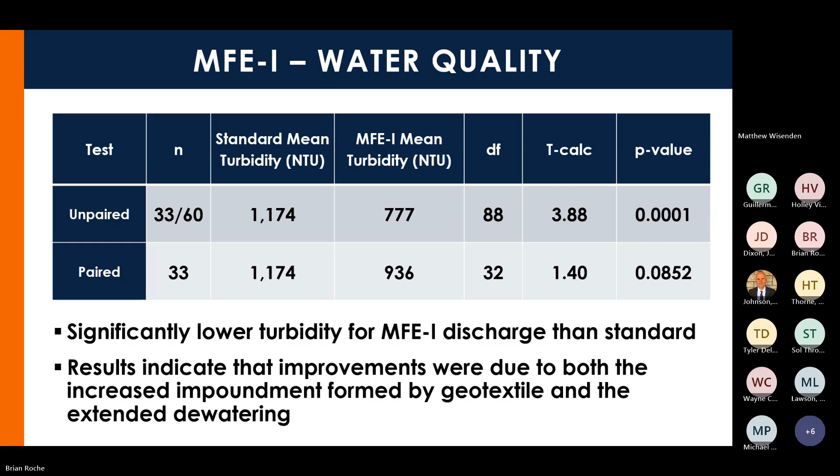Overall, we saw that the improvements for the MFEI increased performance in sediment capture and water quality treatment. However, we saw that the treatment and sediment capture of even these improved installations were well below those found in the evaluation of other sediment control practices using identical conditions. But we did find that the sediment capture was very similar to that found in a forebay composed of a rock check dam with a geotextile overlay under the same conditions.

So overall, due to a relative lack of sediment capture and high discharge turbidity, even of this most feasible and effective installation, compared to other sediment control practices, this shows that these are primarily still an erosion control practice. However, these improvements can prevent erosion and capture some sediment, which can lower the loading on downstream sediment basin practices, or lower the risk of sediment-laden discharge from a site.

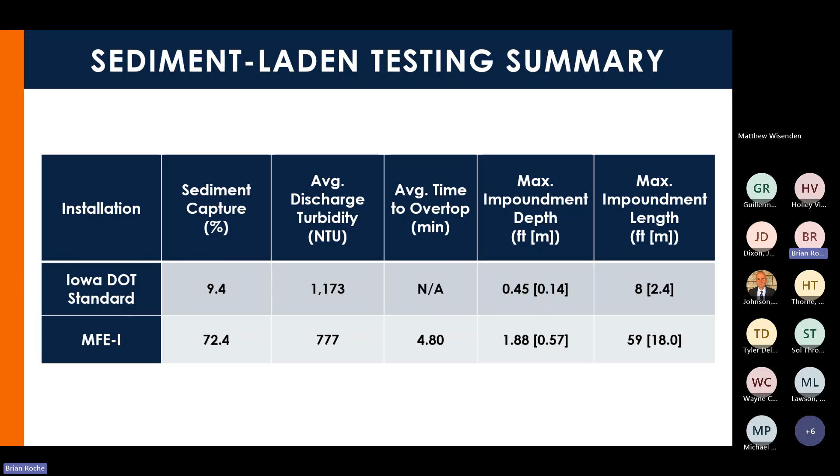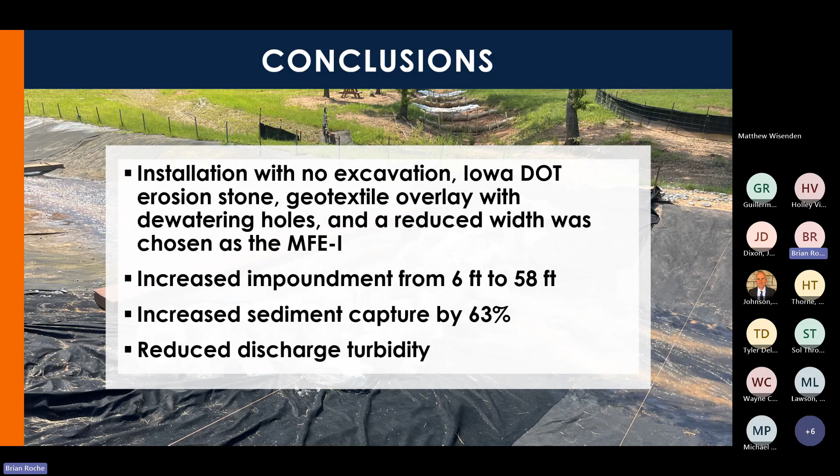So some of our overall conclusions: we found that installation with no excavation, smaller Iowa DOT erosion stone, a geotextile overlay and dewatering holes, as well as reduced width, had the highest performance and the least material cost. So we selected that as our most feasible and effective installation. This installation, compared to the standard installation, increased impoundment length from 6 feet to 58 feet, increased sediment capture by 63% of that introduced, and reduced discharge turbidity.

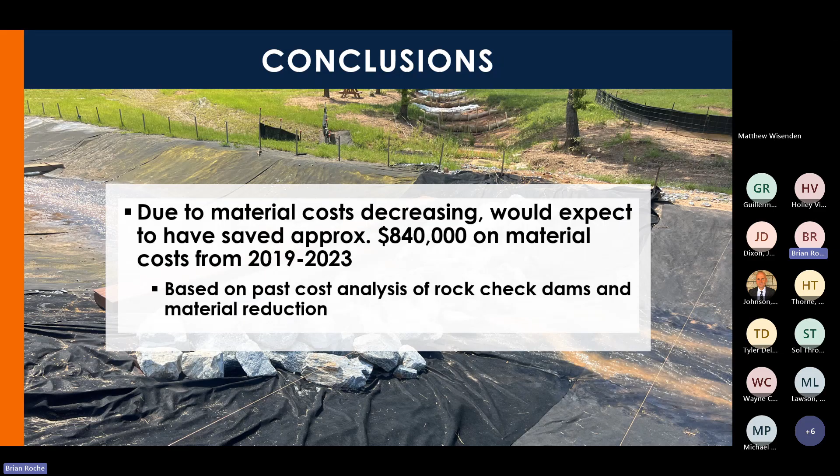We also wanted to look back at that material estimate and those bid tabs we looked at in the literature review. Had the Iowa DOT used this modified installation, we would have expected them to save approximately $840,000 on material alone during that 5-year period. And that doesn't even consider additional savings in installation costs by removing that excavation, decreased maintenance of downstream practices due to slower sediment loading, or downstream remediation of sediment-laden discharge.

So overall, here are recommendations for implementation in Iowa and in any other area that's looking to improve their rock check dam standards: adding that geotextile overlay to facilitate additional impoundment, using a smaller rock to both increase performance without the geotextile and reduce costs, and ensuring proper heights of installations. Adding dewatering holes in the geotextile overlay to ensure impoundment does not remain there for excessive periods of time, to make sure that vegetation can be established in the channel, as well as removing any excavations and reducing width to further decrease material costs.

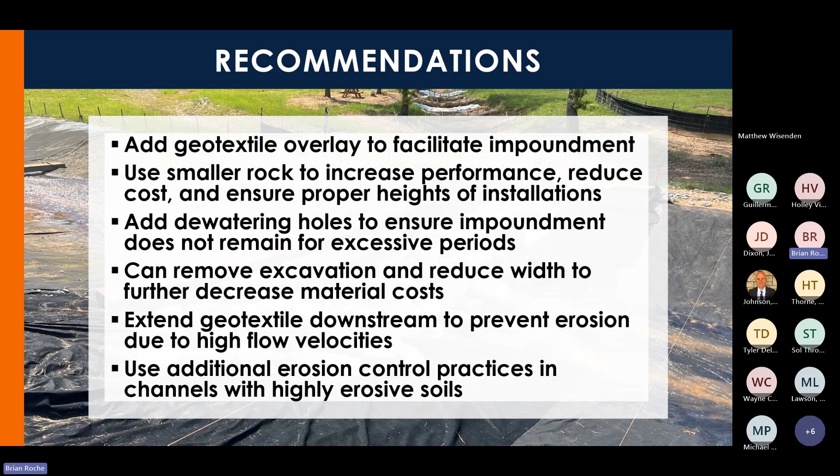And then, due to those high downstream flow velocities and each installation not reaching that maximum theoretical, extending that geotextile downstream to prevent erosion there. Additionally, we recommend using additional erosion control practices in channels with highly erosive soils, just to make sure that you're preventing erosion from occurring.

And with that, I'd be happy to answer any questions. Additionally, the final report for this project is published and available if you're interested in reading more about the project.

Thank you. Perfect. Thank you, Brian. Great presentation, great interesting results at the end.

We had one question from Derek Johnson from OKC, but it has disappeared in the chat. Derek, if you'd still like to ask that question, you can unmute yourself and ask Brian directly. No, I'm good, I actually answered my own question here. Okay, perfect, just wanted to make sure.